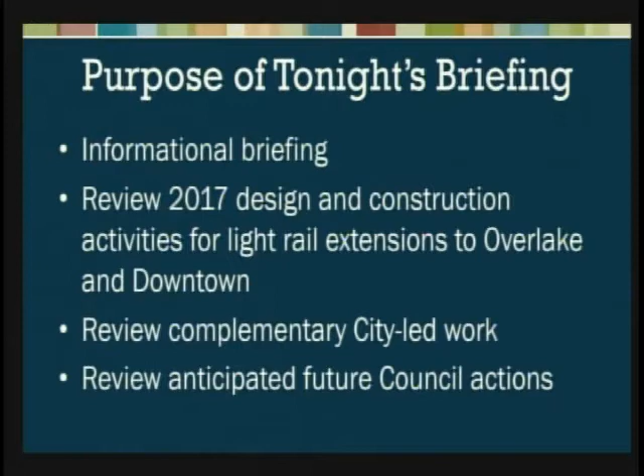Tonight we are joined by Asa Agus, Leonard McGee, and Ryan Bianchi from Sound Transit to share more about the 2017 design and construction activities. In a few minutes, Leonard will update the council on the Downtown Redmond link extension. But right now I want to turn it over to Ryan Bianchi to describe key upcoming activities as part of the extension to Overlake.

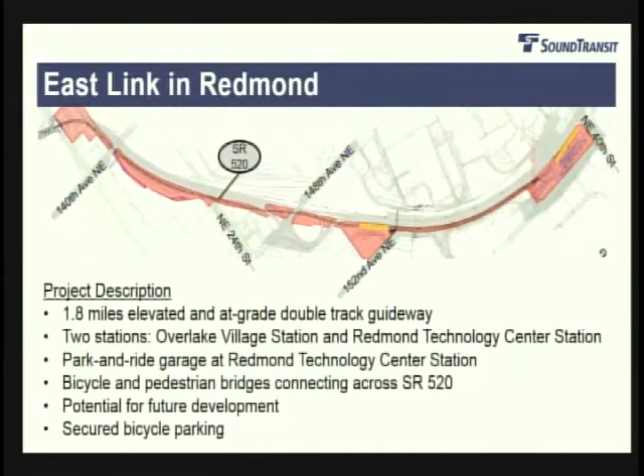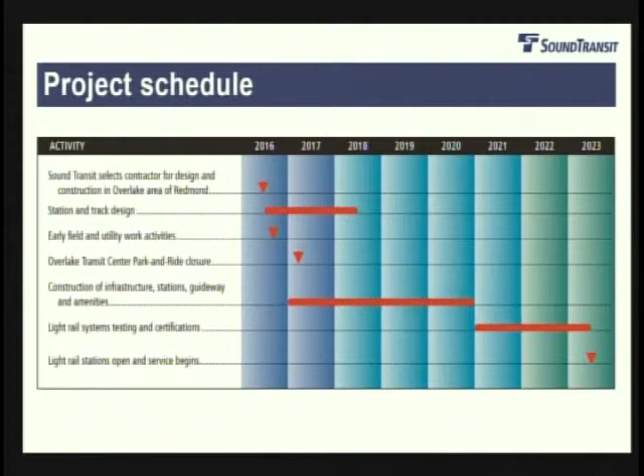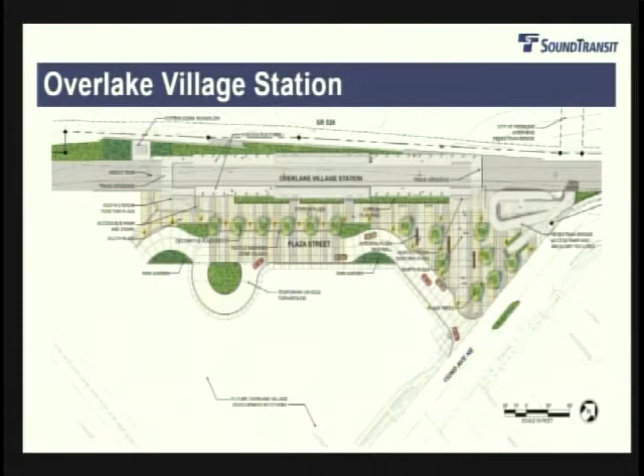Briefly, this is something you've likely seen before - this is the Overlake Village Station site plan. 152nd is over to the lower right-hand corner of the screen. From 152nd is a pedestrian drop-off drive, called a Plaza Street, and that'll be the primary way of getting to and from for passengers being dropped off. You also notice over to the right the 'paperclip staircase,' where you'll be able to connect to the other side of 520 via a pedestrian bicycle bridge. The platform, of course, is right in the middle of the screen.

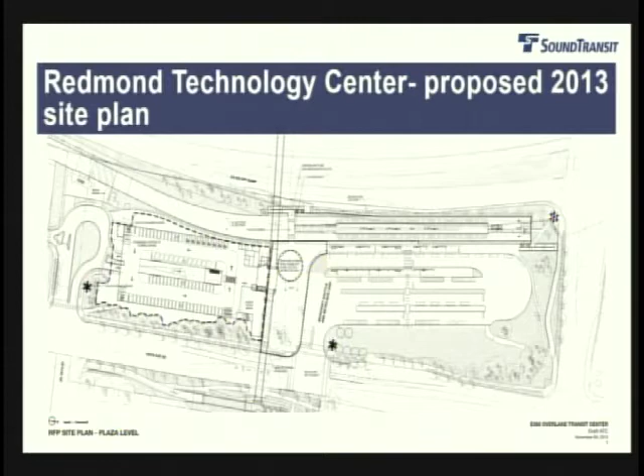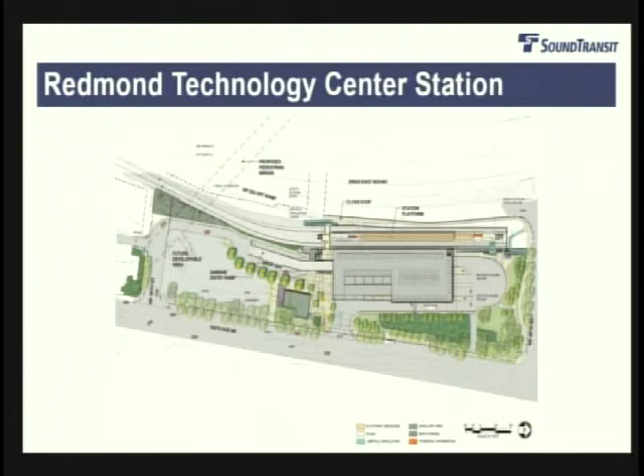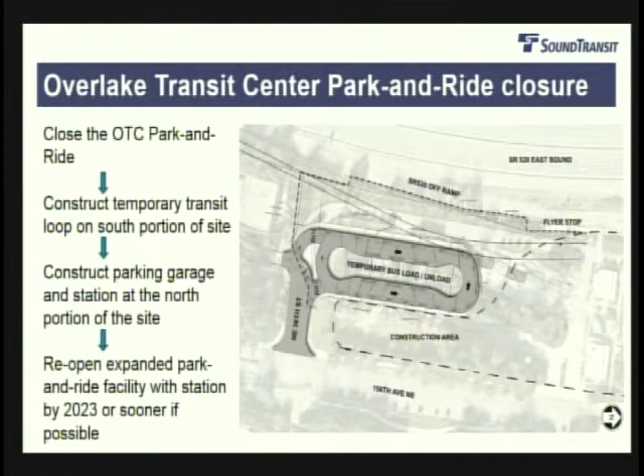As construction begins, both here in Redmond and through Bellevue, we will need to close the park and ride facilities. This shows how we're going to keep bus service going through construction - we'll build a temporary bus loop on the south end of the site at the Overlake Transit Center, then build the garage on the north end of the site and the bus loop over there, which allows us to keep service going. However, the park and ride facility will be closed, possibly as soon as early next year. And it happens that the South Bellevue Park and Ride will also close early next year - they've said January, but it could be sometime in the early part of 2017.

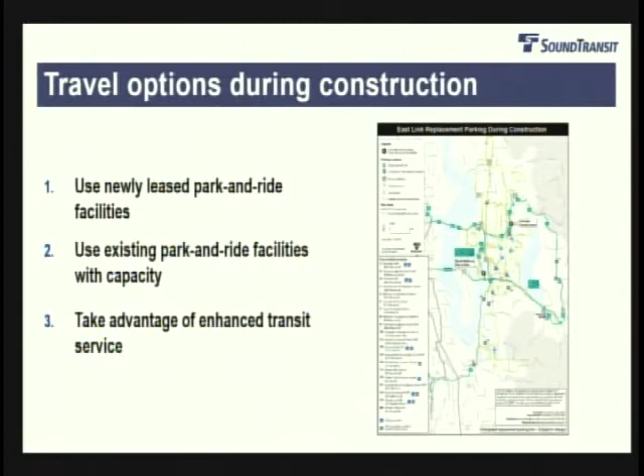Those lots will allow people to access the Park and Ride area or the Overlake Transit Center area. We also have existing park and ride facilities with additional capacity - you can find those on our website as well. We've also added additional transit service. Specifically, the 541 is a great new service that goes along 520 and gets people to the U District station, or the University of Washington light rail station.

I mentioned going to our website - you can go to justonetrip.org and do a commute plan, and you can also qualify for some incentives if you plan your trip that way. Of course, King County and the City of Redmond have great sites for helping people figure out how they're going to get around during construction. That's it.

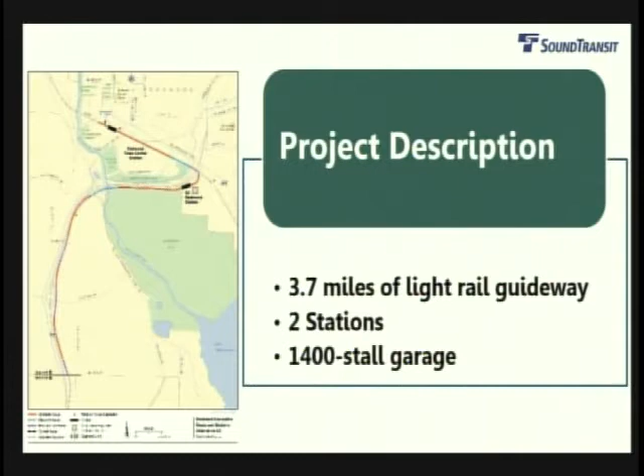The key objectives for preliminary engineering: first, start with project refinement - go back and look at what's changed since 2009, 2011, since the EIS was adopted and the record of decision was approved. We know the environment hasn't changed, but the area has grown up - there are residents there that weren't in the area, particularly downtown. We'll also look at studies the city has done, such as the Marymoor sub-area plan and the city's ongoing transit integration study. Those are things we'll take into consideration as part of the project refinement.

Step 2 would be to update the conceptual engineering that was completed. With all that new information, including from city studies, we'll come up with a new conceptual engineering plan and update the environmental documents. Then with that update, we launch into preliminary engineering.

This is a bird's eye view looking roughly southwest. In the top right corner, some challenges we're looking at: starting at Northeast 40th, getting under it and squeezing between a parking garage on the Microsoft campus and the on-ramp. Then down into the Sammamish River area, we have encroachments into Marymoor Park. There were encroachments with the earlier design, but with the widening of SR 520 by WSDOT in 2009-2010, that has moved our alignment further into the park.

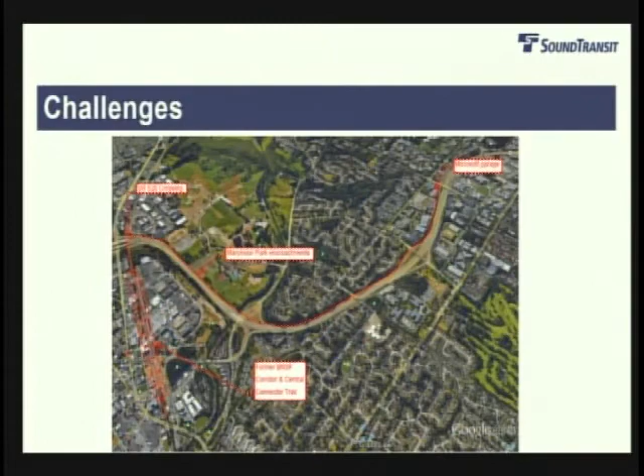So real quickly - DRLE is Downtown Redmond Link Extension, and PE is preliminary engineering. Our procurement ran from May into October this year, and the Sound Transit Board awarded the contract on November 29th. We're looking to give notice to proceed this month, maybe this week. We'll start environmental work and PE through most of 2016 into 2017 and 2018. Final design by 2020, construction by 2023, and revenue service by 2024.

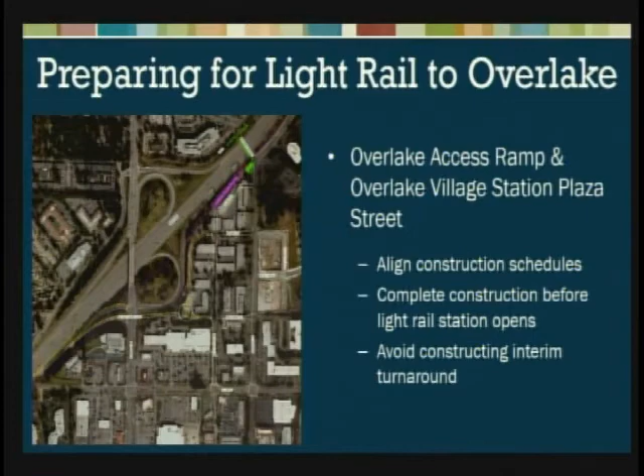First, as you know, the city is advocating through its legislative agenda for accelerating the funding of the Overlake access ramp. At the same time, Sound Transit is preparing to construct the Plaza Street in front of the station, and those two connect. So the city is working with WSDOT and Sound Transit to coordinate those construction schedules so that both can be completed before the light rail station opens, so that the Plaza Street can be constructed all the way up to the access ramp, and so that it's not a construction project when the station opens.

A little bit further north, the city has begun design of the 40th Street stormwater trunk extension. The council authorized the mayor to sign an MOU with Microsoft, which has agreed to fund the project, and the council approved the design contract in October.

As you can see on the map, the project extends the existing trunk line from 40th and 172nd out to Lake Sammamish. The project has multiple environmental and economic development benefits. With the trunk line extension, the city and Microsoft are working with Sound Transit to achieve the greatest benefits at the light rail station itself as possible. This project is expected to be complete by 2019 or sooner, depending on the federal permits required.

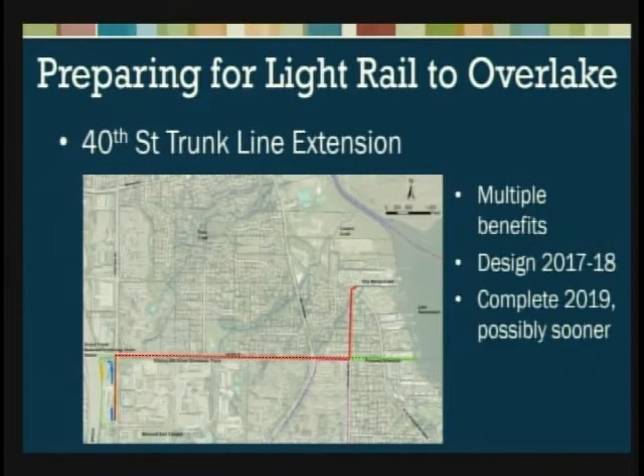So there are a number of actions that we may be coming back to the council to take action on. In the next couple of years, there'll probably be several.

In early 2017, we're anticipating that there'll be an amendment to the master plan development coming back for the Redmond Technology Center to reflect some of the site plan changes you heard about, with the changes to the Redmond Technology Center pedestrian bike bridge. That bridge is part of a number of different documents that would need to be amended. We expect that would happen over the next couple of years.

And then each pedestrian bridge, both at Overlake Village and at the Redmond Technology Center, will require operations and maintenance agreements that we'd expect would come in the 2018 timeframe.

As Leonard mentioned, there are two significant city initiatives underway related to the extension of light rail to downtown. In the Marymoor sub-area of Southeast Redmond, staff is working on a package of comprehensive plan and zoning code amendments that implement the Southeast Redmond Neighborhood Plan that the council adopted in 2014. The plan and code amendments will allow existing businesses to remain and allow new mixed-use, multifamily, and transit-oriented development to start to happen in that neighborhood.

And as part of that, we'll be bringing a recommended infrastructure plan for streets, stormwater, water, and sewer to you as well. A key part of that infrastructure plan is providing access to the light rail station that you see in the purple box, and the red box is a proposed location for the parking structure. We are anticipating your review of that in the first and second quarters of 2017.

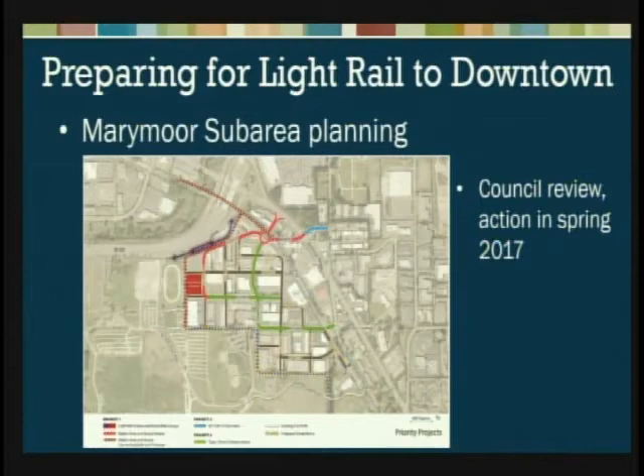I'm moving a little bit down the line into downtown. As Leonard mentioned, we are conducting a bus rail transit integration study, and that is in full swing. The council authorized the contract for that back in the summer. The goal of this work is to develop a preliminary preferred station area concept that provides convenient transit access and fits into downtown and supports the vision for downtown.

So staff is evaluating 4 station area concepts together with Sound Transit, Metro, and WSDOT, all of which are in the Redmond Central Connector Corridor. 2 of them are at-grade concepts at the location Leonard mentioned between 161st and Leary, and also at an alternate location between 164th and 166th in the town center area. And 2 of them are elevated concepts in the same locations, for some of the reasons Leonard mentioned, such as the many potential street crossings.

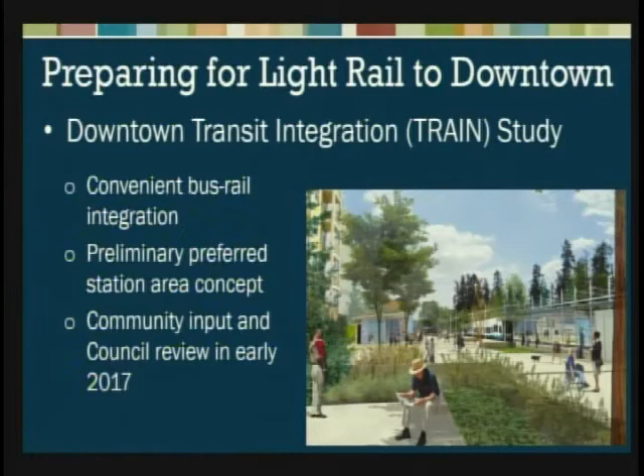The analysis phase is underway right now. We're looking at topics like land use, park quality, utility conflicts, vehicle traffic, pedestrian and bicycle mobility, transit access, safety, and others. We anticipate sharing that analysis with the community and seeking their input early in 2017, followed closely by a council study session to look at all of that information and get your input.

Aside from the Marymoor sub-area planning work and the TRAIN study, the Overlake extension and downtown extension will likely come with a variety of plans and agreements that come to the council. That will likely happen in the next 2 years so that Sound Transit can set itself up with as much certainty as possible moving into final design and construction. As we know more, we will keep you apprised.

Well, that concludes the presentation. Any of us will be happy to answer questions you may have. Questions for Jeff?

Mr. Margeson. Want to give my comrades a chance. Okay, thank you very much for a very informative briefing, all 3.

Just a couple comments more so than anything. We changed the name of the Overlake Transit Center to the Redmond Technology Center. I like to call it the Redmond Technology Center Station to differentiate it from the one where I catch the 545 every day. We got almost all of them corrected in our presentations, but I still see Overlake Transit Center seeping through. So my challenge to staff is to go through and rid us of that name, and also perhaps come up with an acronym for the Overlake Village Transit Center that's OVTC as opposed to OTC, lessening the confusion. That's just a technical piece, since it was one of those things I wanted to change because it's confusing. Which Overlake do I get off the train at?